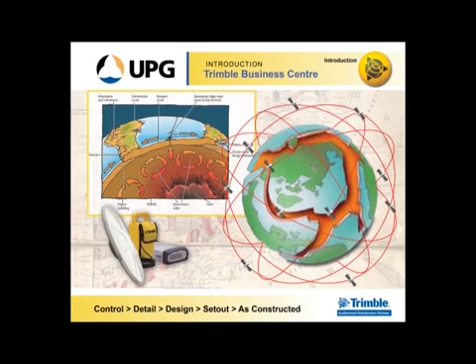I guess it's no longer a theory of tectonic movement. It's more of we know exactly which way it's going and in what direction and at what speed. So the fact that the whole land mass is moving underneath us is creating problems, in so much as even casual users that are using WGS84 can now see the difference with a smartphone between GDA 94 and WGS 84.

So I think in response to that, the government's come to the party and they're going to introduce a new projection, which will be GDA 2020, which kicks off next year. Now that's going to start out as a static projection, which from GDA 94 will be produced using a 7-parameter transformation plus a distortion grid, which will then, at 2020, become a dynamic datum, which means it'll be matching to ITRF, which means it'll no longer be X, Y, and Z, but X, Y, and Z plus time.

So, for instance, if you opened up a file in 2025 that was created in 2020, your software might ask you, do you want to update to the current epoch? And it'll shift the distance that the world has moved since that file was created. And that's underlined by some of the ICSM guidelines. Well, SP1, which everybody knows, is now quite upfront in recommending people do use GNSS for surveys.

And this is also from SP1. We're trying to work in this quick static, classic static area, possibly out to network RTK, but these are the kind of accuracies that we want to be working in. This graph shows survey uncertainty against observation time, and more or less shows that we're working with static surveys for datum quality control. And that's underlined by this table here, which is also from SP1.

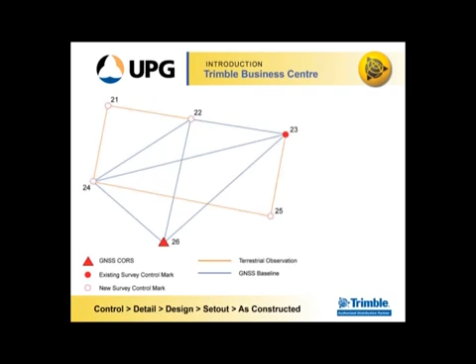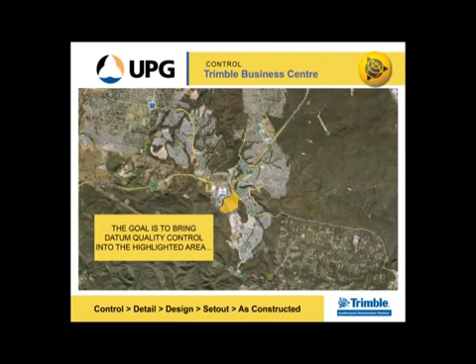Notably, they've also shown that they'd like to see people combining terrestrial observations with GNSS baselines and producing new survey control marks from existing ones, and combining all of those using network adjustments. So this is an example showing how you might go about patching together a network adjustment. One of the things about network adjustment is that you're not supposed to use any closed figures, so it's all open figures.

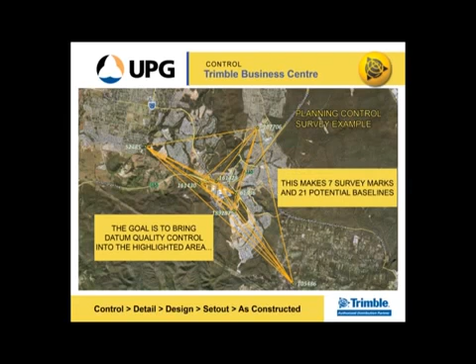So if you were to propagate datum quality coordinates into this yellow area here, you'd first identify your horizontal marks and then identify the vertical marks, then tie those together with any potential baselines, make a plan of the ones that you want to use, and then work out how many sessions you would need to build up the profile without any closed figures. That is, without any trivial baselines. In this case, you'd need 4 sessions to make sure everything had been occupied at least twice. That way you've got redundancy in the survey.

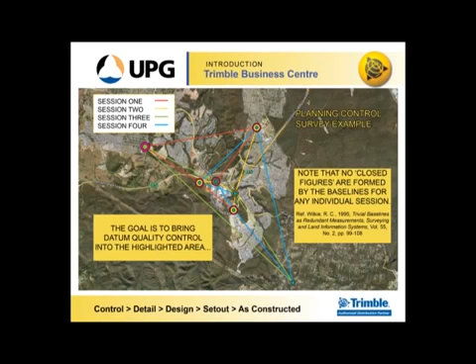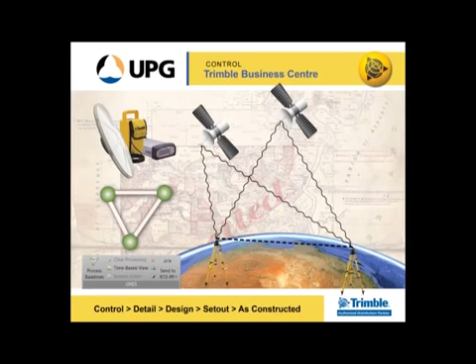Then you take it back to the office, and in Trimble Business Centre, you process baselines. Trimble Business Centre has got an improved baseline processor now. It's certainly being used quite broadly with state government departments and amongst surveyors themselves. So it's one of the ones that probably is more reliable in the market.

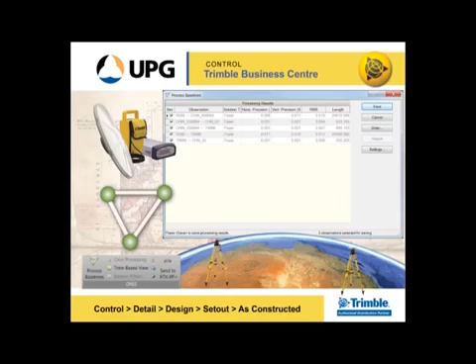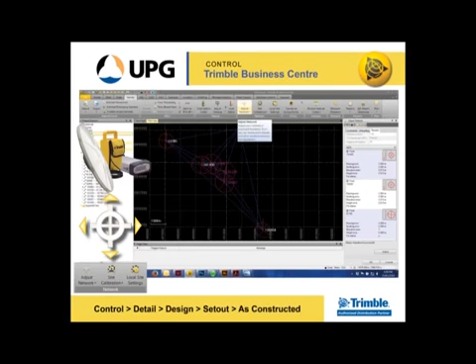It also has the ability to perform network adjustments. I won't go into that at the moment because that could be a whole session by itself. Just to note that this is the preferred mechanism for adjusting surveys, and you can use terrestrial observations and GNSS baselines in this process to produce control coordinates.

One of the things surveyors are encouraged to do is to connect to MGA or a datum. I know that the CSR in Queensland now requires cadastral surveys to connect to MGA if they're 10 lots or more. So some of these are the methods that you might use to do that.

There's the old site calibration, which has been a bit of a staple for engineering and construction surveys for quite some time. It is still probably usable in a cadastral sense, so long as you recognise that if you use it, any errors that might be in the original survey will propagate into the site calibration. So use it with caution. If you take somebody else's site calibration, then I guess you're really working on their survey, not your own.

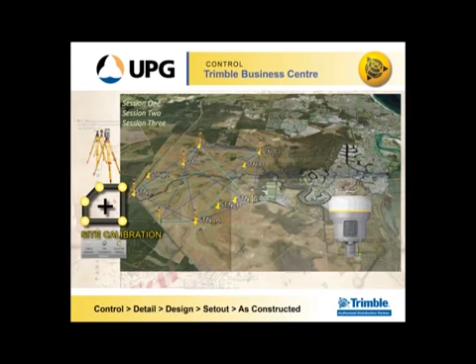But that would be to run a traverse around there, and that will produce an adjustment result. You then occupy some or all of those marks using GPS. Probably if you're striving for datum quality marks, then you would observe for 6 hours or longer, but a lot of people are using quick static, which is general purpose control, in which case you could occupy these for possibly an hour or two.

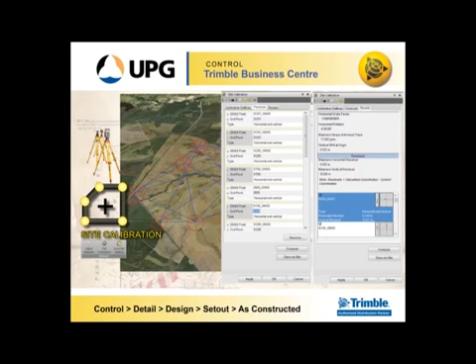So you build up the sessions and then process the baselines and adjust the GNSS part of the survey, and then marry the traverse and the GNSS adjustment together using a site calibration. That allows you to assess the fit between the two, and then if you're happy with the outcome of that process, you can save that site off as a local site, which you can load onto your controller. So anybody that's using that site is virtually choosing that on their controller as a projection for the job. So everybody's working on the same page and everything should fit together.

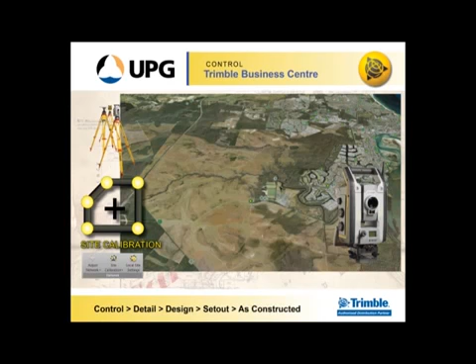Another example would be local site settings. Now this one takes the underlying characteristics of the grid, the MGA for example, and applies a combined scale factor to it so that the ground equals grid. Just to be a bit clearer on that, if you look at this situation here where you possibly would log a control network incorporating horizontal and vertical marks and densify as required, do an inverse along that red line there that you can see. TBC shows this because it tracks global, local and grid coordinates at all times.

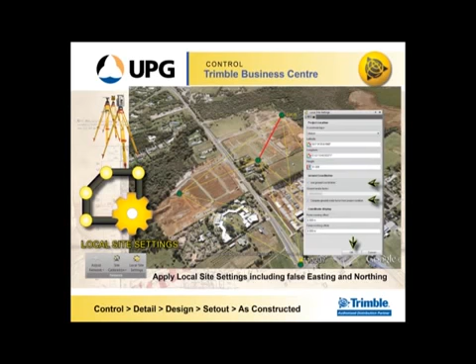It shows the difference between the grid and ground distance for this vector at 146 millimeters over 370 meters. So that's the sort of error that you can't let stand in your work. So applying the local site settings applies the combined scale factor to bring that difference to 0. Now that will work over a smallish area, maybe a couple of kilometers. You'll get away with that before it starts distorting again.

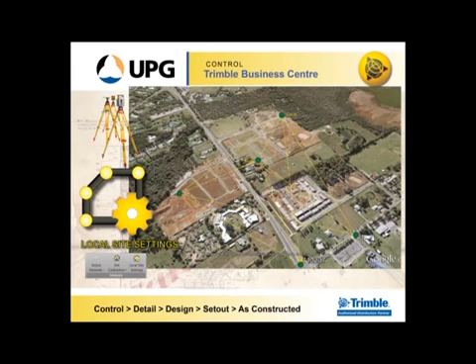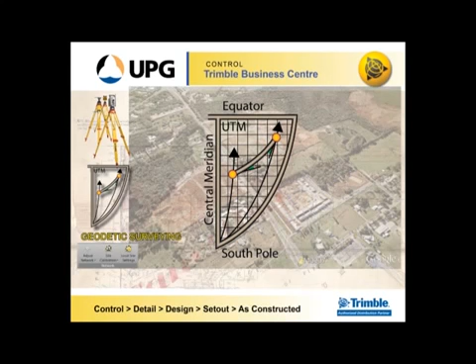So in a situation where your job site is 1 to 2 kilometers across, that is a pretty good solution, particularly if you're near to the middle of a UTM zone. As you're aware, this is a little bit of theory. If this diagram here shows half a UTM zone, you can see that the closer you are to the middle, the more square and perpendicular your grid is, whereas if you get further out, there's more angular distortion in it.

But an example of how that local site settings works would be more or less fitting this green plane here to the surface where you are so that there's no distortion from that projected plane.

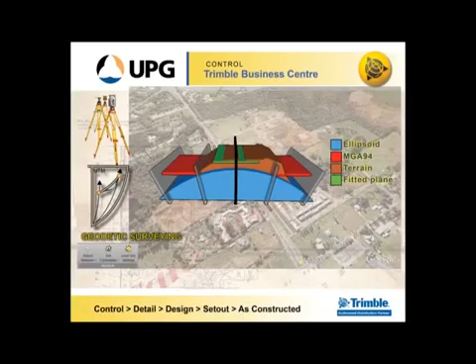So that works quite well where you're close to the middle, but if you're out on the edge, for instance, like that, and you've got that kind of problem with angular distortion, then you might be better off using a local transverse Mercator, which in effect takes the meridian that you're on and applies a UTM zone to that meridian with its origin at the point that you're at.

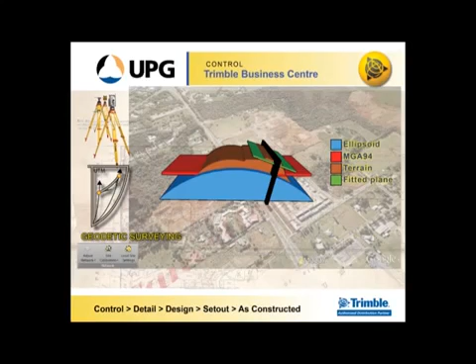So it will give you a good fit for your data, and ground will equal grid, but you must remember then that those bearings that you take on that system are no longer MGA bearings, and you'll have to translate it back to MGA before using them as MGA bearings.

This is just an example showing integrated surveying. It's just to really highlight that you can also set up in MGA and work in MGA itself. This is usually more of an engineering and construction sort of a thing, because it only works for very small areas, but it can be done.

Like in this scenario, you've got an earthworks volume needed for tender for this. So what they want to do is get a topo survey done for this area here so that they can do a surface to surface volume from a design that they've got in mind for the site.

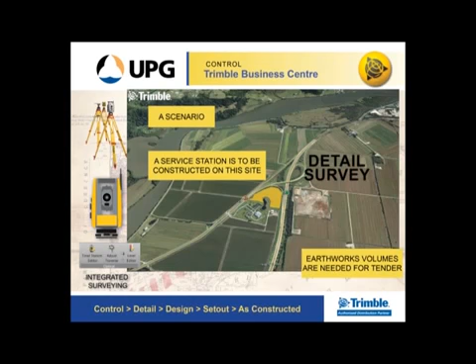So in this situation, they picked up the control at the same time as the topographic information. They used 2 points for logging static data and the third point as an RTK base, which they also used for logging as well, by using an RTK plus logging survey style, and then did half of the survey with the GPS or GNSS receiver, and half with a total station.

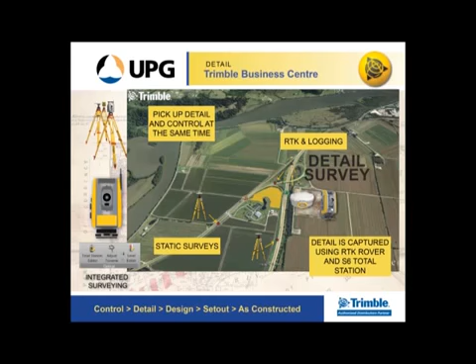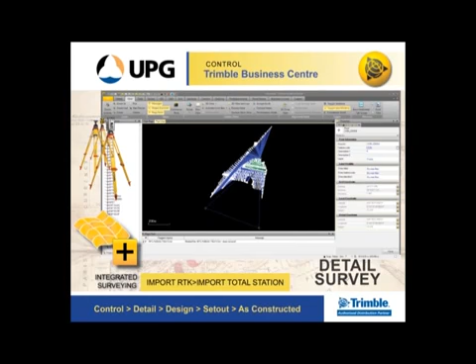So in this situation, you bring in the RTK and process that, and then scale in the total station data, working out what the scale is at that point, and then create strings and layer the data to then create a surface from that data. Now, from that surface, you can then create the design and then use that design to create a second surface and then do surface to surface volumes for tender.

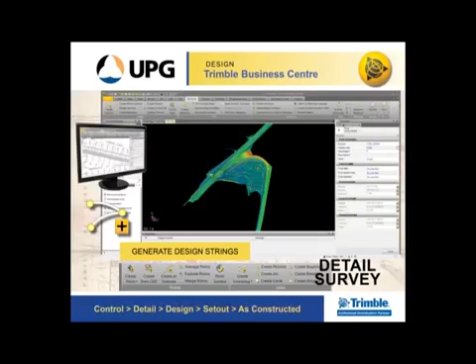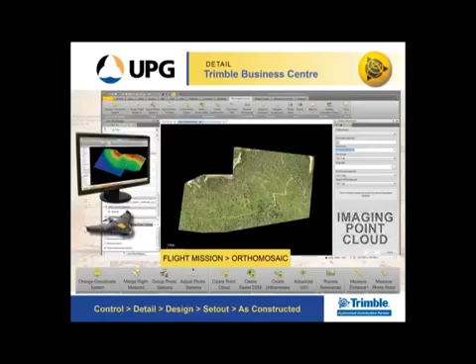But before I move away from surfaces, I just wanted to point out that TBC's also got this suite of tools in it now where you can take the UAV data and create DEMs with that. So that more or less works by creating a point cloud from dense reconstruction. So it uses aerial photogrammetry to create it.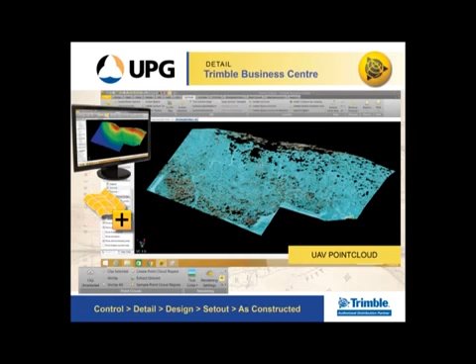And they've brought in RealWorks filters such as extract ground, which can be applied to, for instance, take all the trees out of that data so that you can then create a bare earth DEM to use for design purposes. I've also got a request in at the moment for them to add a D-spike function to those surfaces so that you can smooth it out even more.

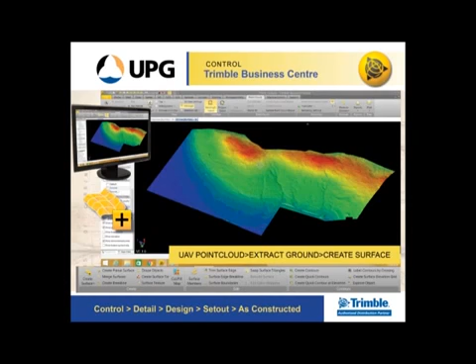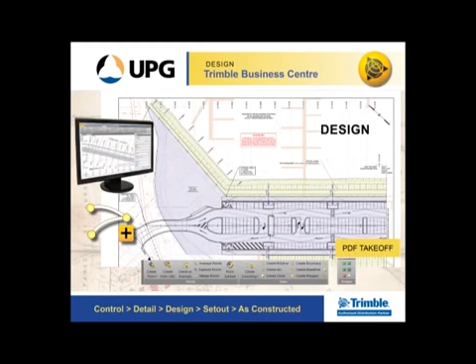From a design perspective, there's tools in there for PDF takeoff, which is quite a handy thing. This is a tool that allows you to take a vector PDF and extract the line work from it. And once you've got the line work, you can then georeference it and elevate it. So that could be quite a useful thing.

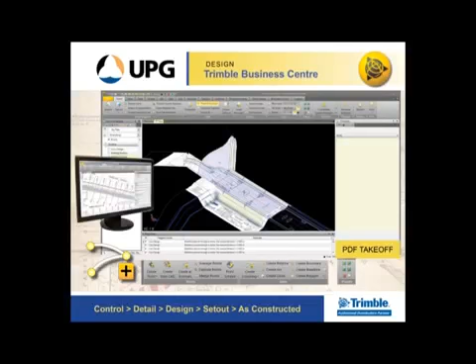There was a situation that arose where a design was issued for construction drawings, which had DXFs with it for setting out, but the DXFs were different from the drawings. So they were able to, in that instance, take the vectors straight off the PDF and georeference them and use them in the field. For example, you can extract it straight off the top and use it for modeling and put that out as surfaces and line work out to a controller for set out for construction, or even out to machine control as well.

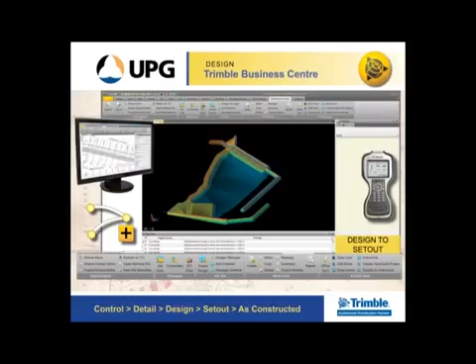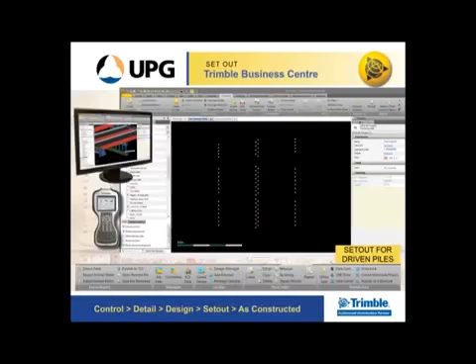The other thing that they've brought in recently has been this access to IFC construction models. That's the design standard for 3D modeling in Revit and Tekla, so you can bring these models through. In this case, you've got driven piles for a bridge construction. So these are quite detailed, these models.

They get down to where the steel is and the lifting lugs for concrete panels, or even down to nuts and bolts. This is the driven piles in 3D. So anything that's in any of these models you can put on the controller and take for set out. So that includes the pads and columns and wing walls, as well as the decking and the surfaces and slabs for the bridge.

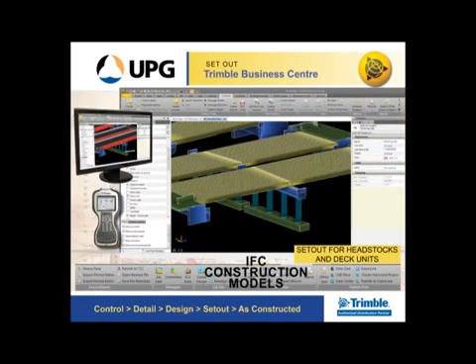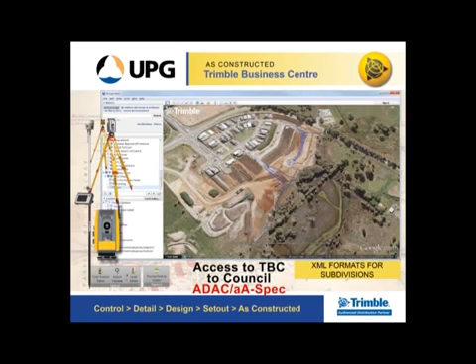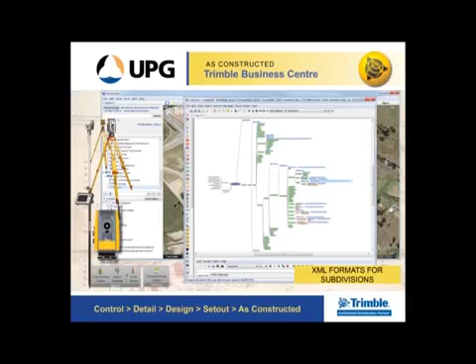There's also been a lot of work done in the as constructed area, particularly with respect to the XML transfer formats, such as ADAC. In this situation, you take the schema that's been specified by the engineers, in this case ADAC, which is more or less a Queensland and New South Wales standard at this point, but it's also being used in South Australia and possibly will be adopted more widely than that. In this example, it's under sewerage, you've got a non-pressure pipe, and under the attribute of use, you've got a whole lot of allowable enumerations.

So what we've done there is we've extracted from that an FXL feature code library, in which we've included line control codes, as well as all of the attribute information for those categories. For instance, here under sewerage is also non-pressure pipe again, and under use we've got all the allowable enumerations. So that goes straight onto your controller. You can take that out into the field and pick up all of the attribute data that is required of you.

And obviously these are formats that are eventually submitted to councils, and I think the idea behind that is that it'll get rid of the paper plan and even the PDF, and at the end of the day it'll only be the XML that goes to the council, and that'll be lodged automatically through a web portal service.

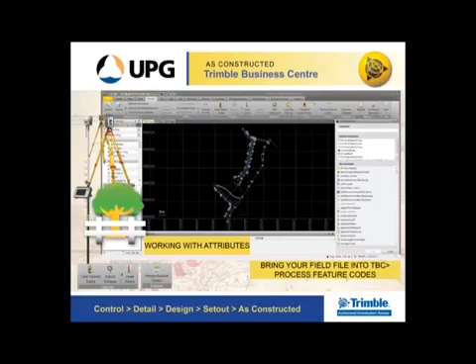So in this situation, you bring the data in that you've picked up in the field, and using all the line control commands you can auto draft that, so it's really just a 2-button click to get all the line work into it, which is a lot less painful than some of the old connect the dots systems that I've seen. And that's perfectly in 3D, so we've tested that every which way we can, and we're certainly not losing any geometry in it. We've taken advantage of some of the advanced geometric features of Trimble Business Centre and been able to work them into the ADAC format.

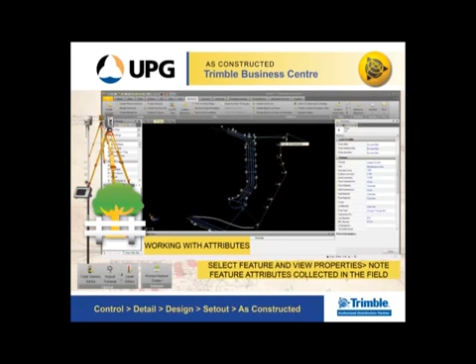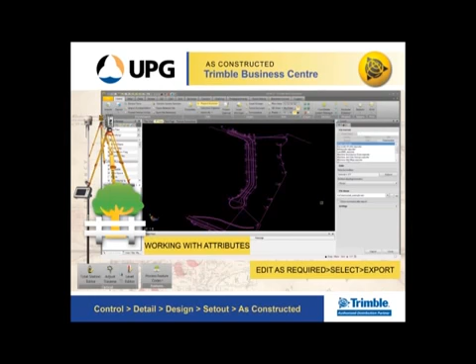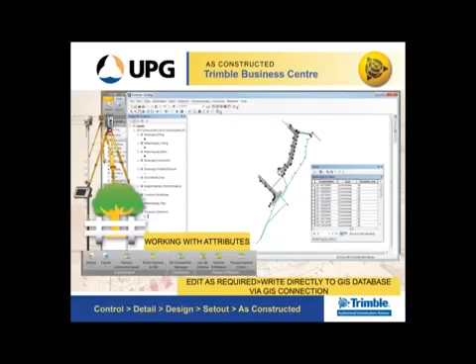As it ends up in GIS, we've also got tools that will write it directly to GIS. This ribbon here allows you to make a connection to an Esri database and to extract a schema or to write features to and from the database itself. So anything that's in GIS can be written out to TBC, and anything that's in TBC can be written into a GIS database. It's quite an open format and quite flexible, and we've tested that fairly extensively and it works quite well.

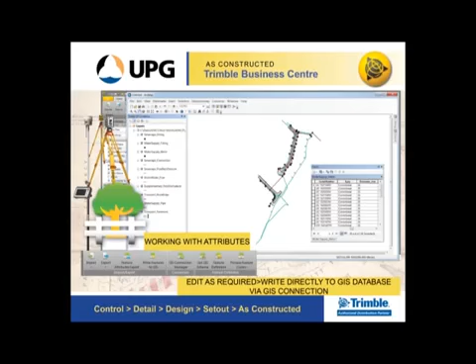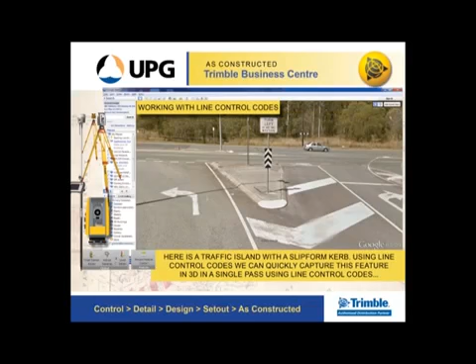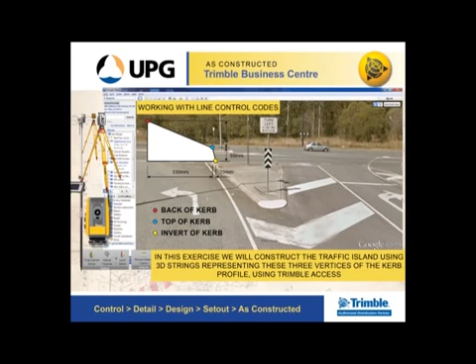This is just a little thing that I've tacked onto the end here. The object is to pick up this traffic island in, say, 12 points. So because that's a slip form kerb and the slip form machines have a bubble on them that the operators are supposed to be aware of, it's assumed that this sort of kerbing is something where using offsets is quite a valid approach. So in this situation, you use Trimble Access, and measuring codes, you enter this code here.

This RE3 is road edge, the third instance of road edge. The ST means the start, a line, and then there's two horizontal and vertical offsets. So by taking one shot there, you're actually picking up 3 positions. So you start there, move up there. This STTA is start tangential arc. On the other side, it's stop tangential arc.

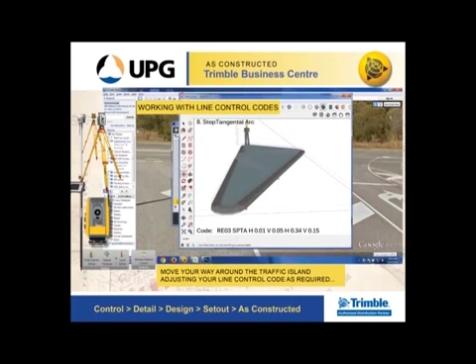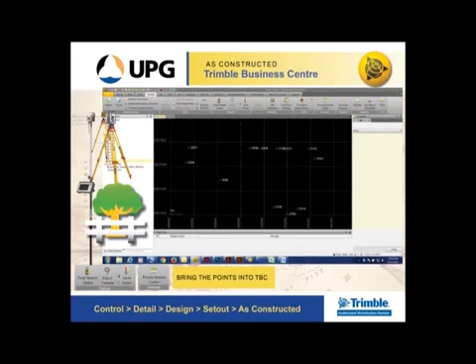You move down to the pram ramp where you maintain offsets only, and then adjust the offset by allowing the back to roll out the distance of the ramp. Maintain that on the other side, and then readjust the offsets and run through 2 more tangential arcs before closing the string. So then you have 12 points back in TBC, which you can use this one-click auto drafting function, which is process feature codes, to give you that using those line control codes. And just to show that 3D, I made a little surface out of it so you could see that it works.